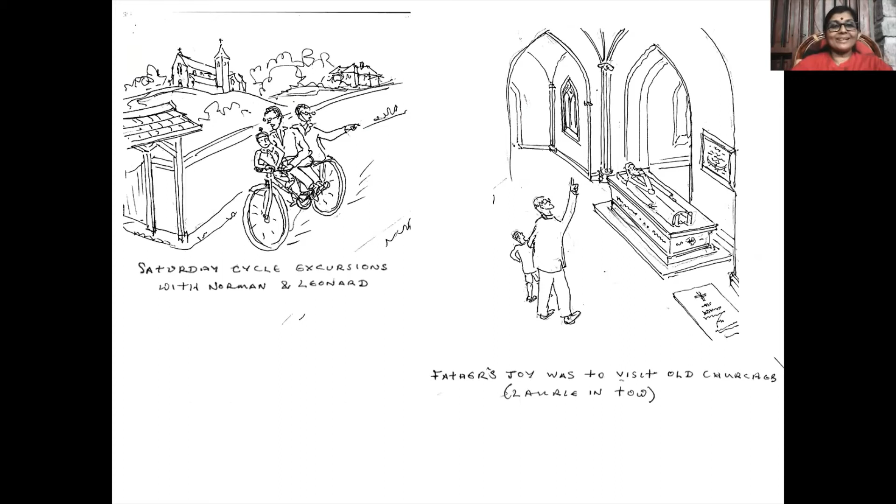But he was always interested in architecture, as you can see from some of these sketches, which are his own. There were Saturday excursions where during weekends he and his brothers used to travel by bicycle around the countryside, look at buildings, and he particularly used to happily share with us how happy his father was taking him around buildings and pointing out architectural features and telling him about the history. So all these influences were already there much earlier, before he joined his architecture course.

And remember me saying about the World War, right? So at that time we had to take the break. But he became a paramedic with a Friends Ambulance Unit, and he had to go to China and Burma.

And while there, he worked very much among the rural poor, to the extent that there was an interesting incident when he met Mahatma Gandhi on the way back from China. In those days, you had to wait for a few weeks at least to get a connecting ship to England. So while he was there in Bombay,

a Britisher, a fellow Britisher, took him to see Mahatma Gandhi, saying, 'You must meet this man.' And while he was there, what happened was Gandhiji happened to notice footwear, which was handmade by himself. Gandhiji noticed it as soon as he saw it, and he asked to see it. And everybody was horrified except Laurie Baker, because he didn't know the cultural connotations of what he did, and

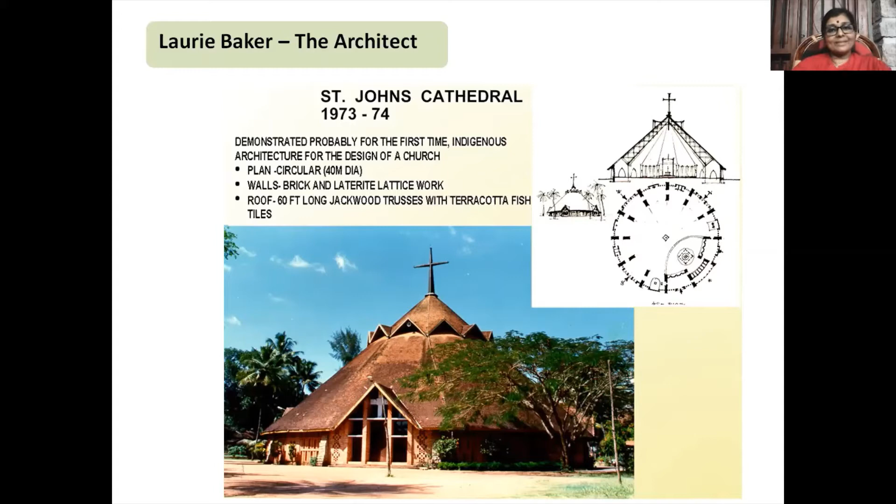One building I'm just mentioning here about Laurie Baker the architect is St. John's Cathedral, which was built in 1973. This building actually won a medal from the Pope for indigenous Christian architecture. But it's also a testament of the times that this building was razed to the ground, and another building similar to this, but with none of the ethos of this building, was erected in its stead. You can look it up, it's St. John's Cathedral in Kerala.

His terrain-friendly design, these are sketches of buildings in the Himalayas, and he had sketches also of how you must approach it, in his booklets, very small booklets which he always wrote and sketched by hand. Now we know what happens when we interfere with the terrain, but in those days he recognized it too. If you think about it, a lot of the things he said then are happening now, the climate change, how we should treat the earth gently, and especially the responsibilities of an architect in doing all this. He spoke about all of these things.

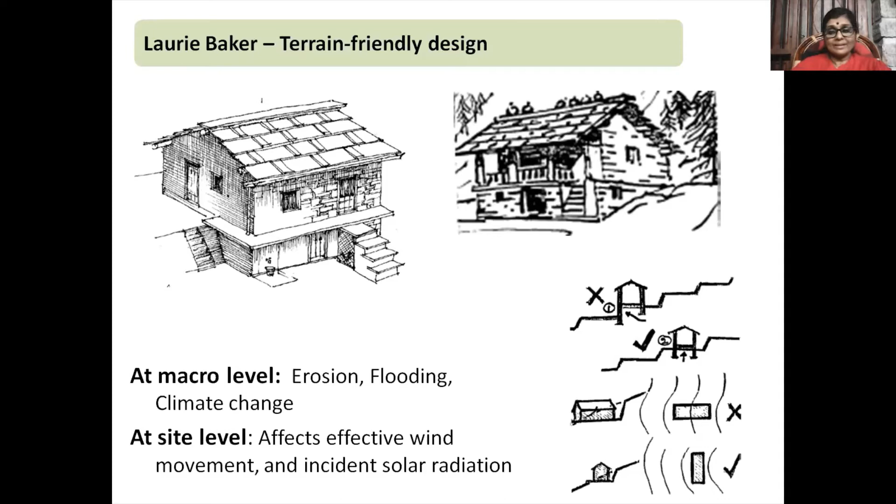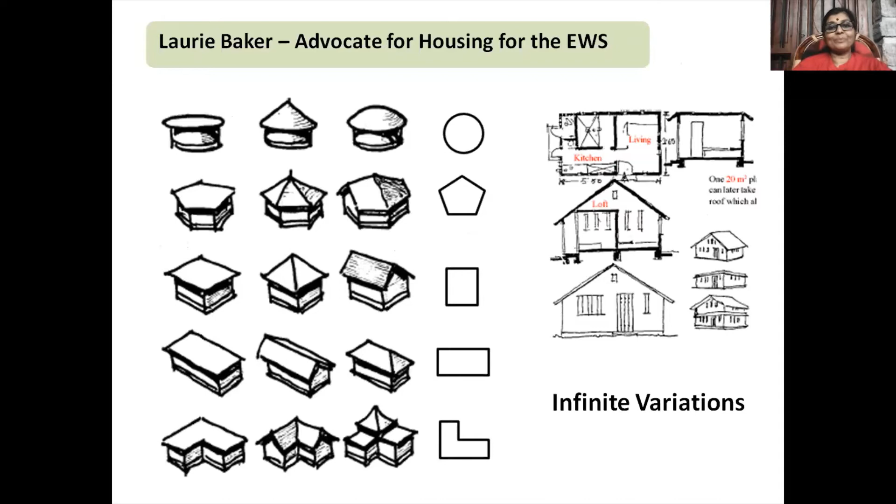He was an advocate for housing for the poor. I'll just skim through these slides very quickly. It was all his sketches saying that we must do these things, like incremental housing, how we could start with a core house and then build up from there. And he sketched infinite variations of the theme of how it all should be different, and not just box-like houses where you put people into.

Can you imagine an architect actually, this is his working out, can you imagine an architect working out the number of bricks in a 20-meter squared house? Because that is the amount of interest he had.

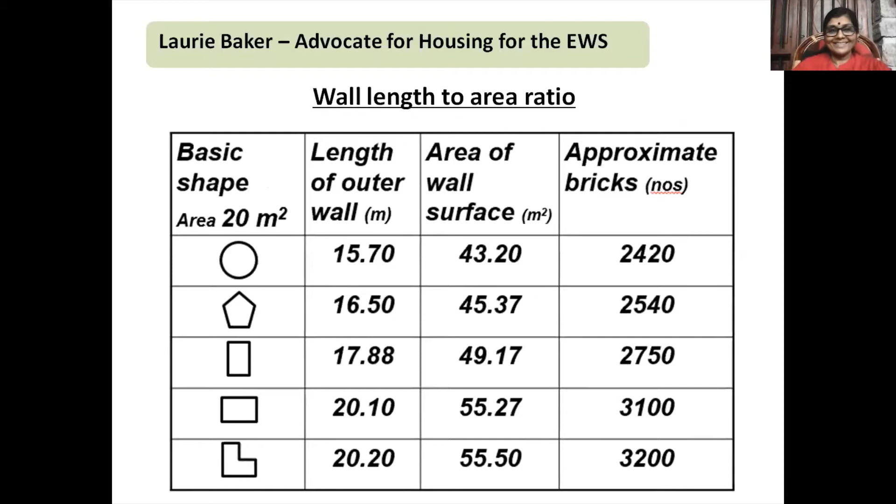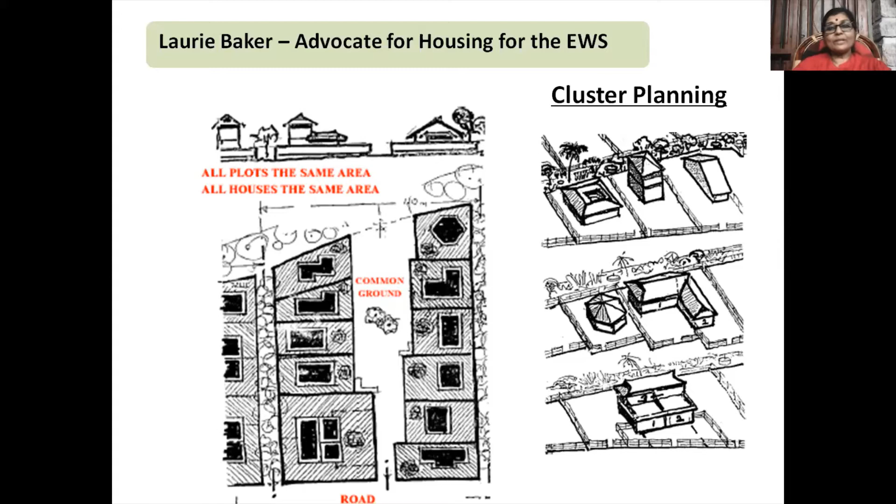And he spoke of cluster planning. You will notice that the common theme when he advocated housing for the economically weaker section was that it does not have to be a type design. You have to have that very personal, very site-specific touch when you design for them. And again, you can see the number of combinations he had. He very simply explained a lot of things through his sketches when he was not actually speaking to people about it.

Moving forward, I've been speaking of COSTFORD, I've mentioned LBC also. COSTFORD, the full form is Centre of Science and Technology for Rural Development. It's a non-profit making organization, established for 35 years now, and Laurie Baker was one of the leaders. We spread throughout Kerala, and occasionally we do work outside also. The reason I mentioned COSTFORD, as I said earlier, is because most of us came to work in COSTFORD because of Laurie Baker's presence there.

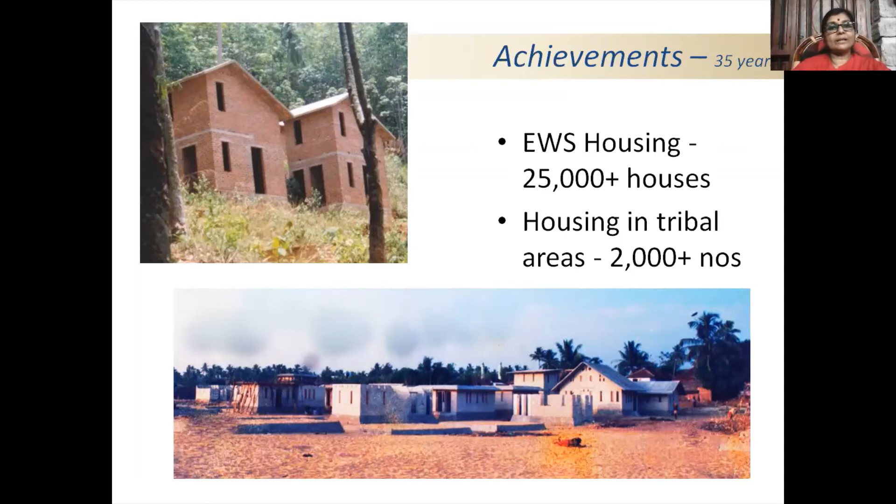Just going quickly through some of the works that are done, in case you thought that COSTFORD, through Laurie Baker's approach, built only houses for the poor. His approach was that whatever you do, it has to be site-specific, climate-friendly, cost-effective. So if you have to build a swimming pool, you build a swimming pool, but make it cost-effective.

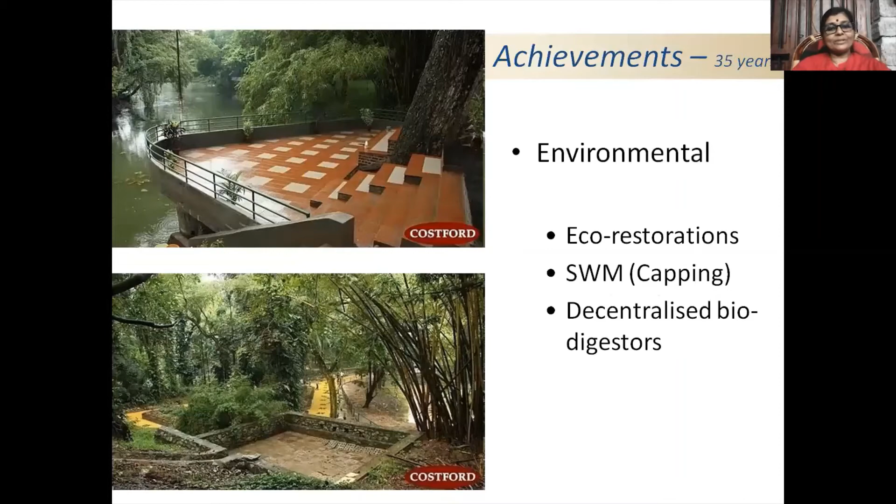These are some projects that COSTFORD has undertaken. Laurie Baker Centre was inaugurated in 2009, two years after Laurie Baker passed away. Now, the reason for this new organization, which is a sister organization to COSTFORD, was we felt after Laurie Baker's passing that there was a need to spread the ideas that he had. It was not just that Laurie Baker was associated with brick and ideas, but there were so many ideas, as you must have noticed now, behind his work. So this had to be told, and there had to be networking between like-minded organizations.

With Mummy's blessing, she was a founding chairperson. Laurie Baker Centre for Habitat Studies was started, and it continues now with these activities. Let me mention the present Laurie Baker Centre campus was designed by Laurie Baker. It was the last project in which he was fully involved from the design stage to the construction stage.

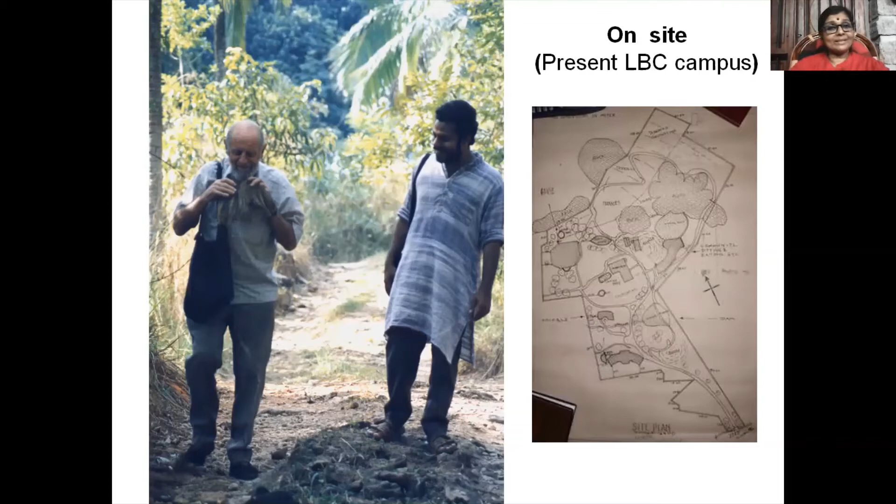Here in this photograph, while he's coming for a site visit to the current LBC campus, he just picked up some coconut husk from the ground, and he's pretending that he has a longer beard than he actually has. As I said, his sense of humor was something that permeated his life and also his architecture, if you think of it. I'll just be showing very quickly some photos of the LBC campus, the buildings within the campus.

LBC campus, excuse me.

These were experiments in Bamboo-crete. This is a water harvesting tank with a lookout point on top. This building to the right is a recent addition, and you will notice that many buildings have started in LBC,

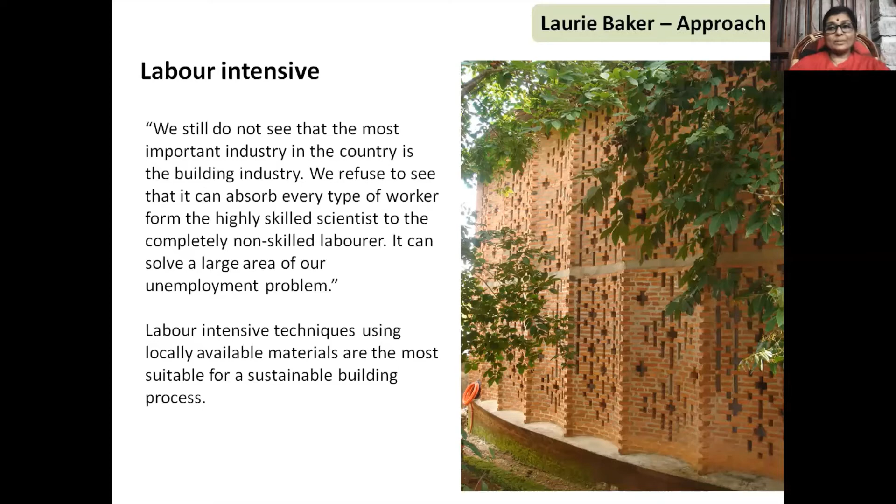He spoke of honest architecture, and said the use of materials, where you can see materials as materials. He said once you start thinking and using materials in that manner, it's not only the building that you're affecting, but it integrates - I'll quote him - integrates in its design all of the needed surrounding. And he was always an advocate of his buildings blending with the surroundings. And he spoke up for labor-intensive techniques, because he said the construction industry can absorb every type of worker. So the lesson we learned from him was that labor-intensive techniques using local materials are usually the most sustainable way of building. And in the coming presentation with Sarjan, he'll explain more why.

When Mommy decided to write a book on Laurie Baker, because everybody sees the architect side of it, she wanted to tell people about some of the background of Laurie Baker, how Laurie became Laurie Baker. And then she decided to name it 'The Other Side of Laurie Baker.'

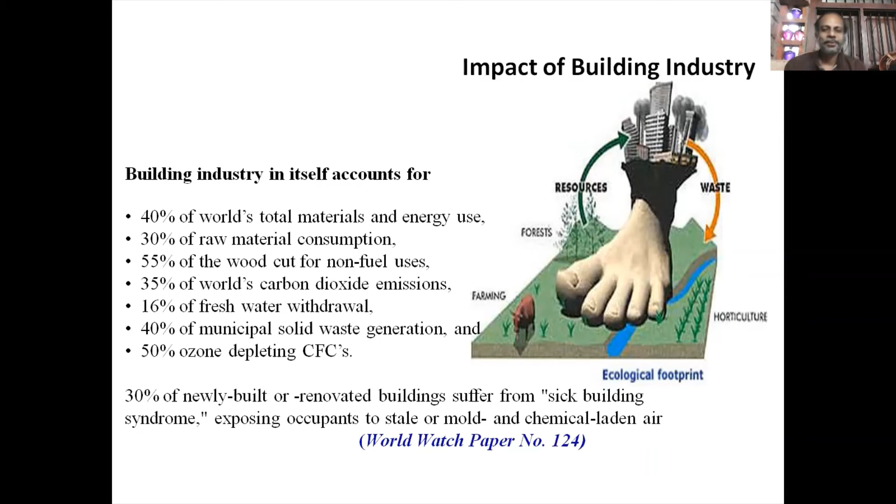The importance of construction with biomass is that when a plant grows, it absorbs carbon dioxide from the atmosphere and stores that carbon in its system, which is called carbon sequestration. That became carbon neutral, a term used in the scientific community. When a tree grows, it absorbs carbon, and when we use that tree as a building material, we are also storing that carbon dioxide in our building. This will reduce the carbon dioxide in the atmosphere.

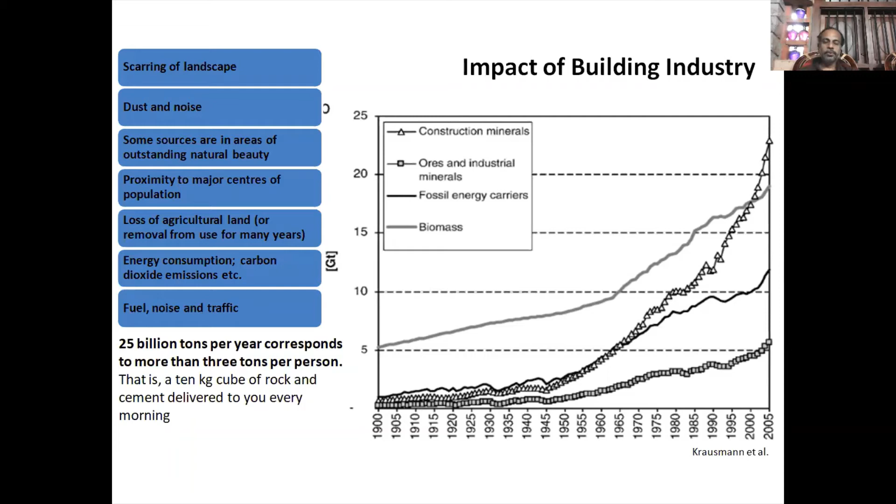Instead, when you produce cement or other materials, 1 ton production of cement will release 0.83 tons of carbon dioxide. This is the comparison between cement or minerals and biomass.

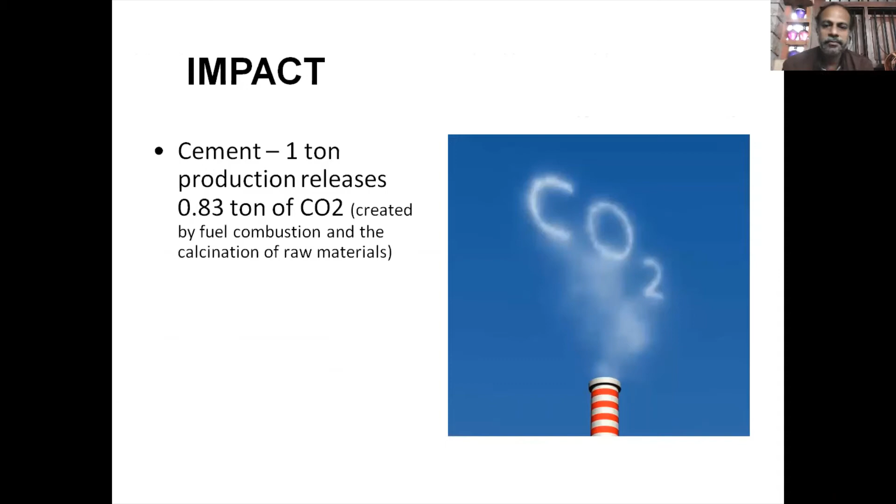See, the process energy requirement of material. You can go through this highlighted one. Cement needs 1 kilogram, and when you produce 1 kilogram of cement, 4.6 megajoules of energy is required. For your information, all of us pay our electricity charges for units. This 3.6 megajoule of energy is 1 unit of energy, and 1 kilogram of cement requires 4.6 megajoules of energy.

See another example. Steel requires 33.3 megajoules. Here you can see this. Glass requires 12.7, and aluminium, 1 kilogram of aluminium requires 170 megajoules of energy.

Most of our new generation buildings use ACP panels, aluminum composite panels, for their outside. Whichever city it may be, Trivandrum or Hyderabad or Bombay or Delhi, all of us are using the same ACP panels for beautification of our buildings. The problem with ACP is that it's a composite material which cannot even be recycled later. The main advantage of aluminium is that it can be recycled, but ACP, because of its composite panel using composite material, recycling is impossible. That is the major setback of using ACP.

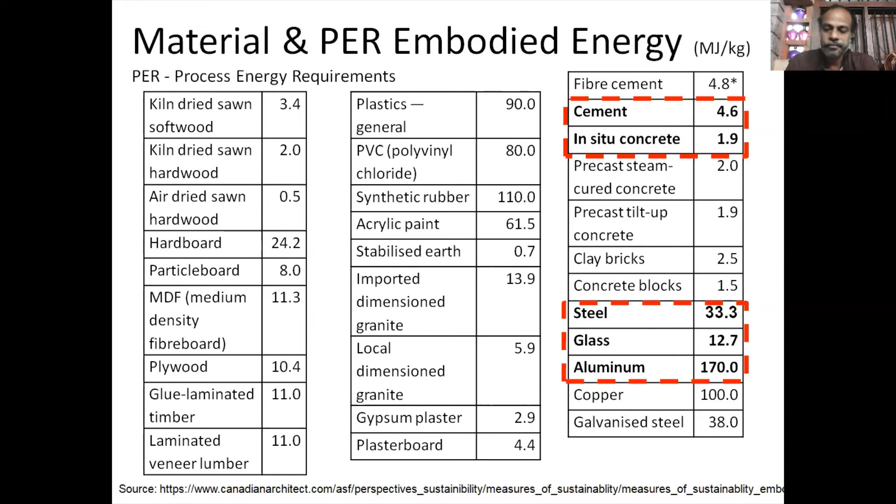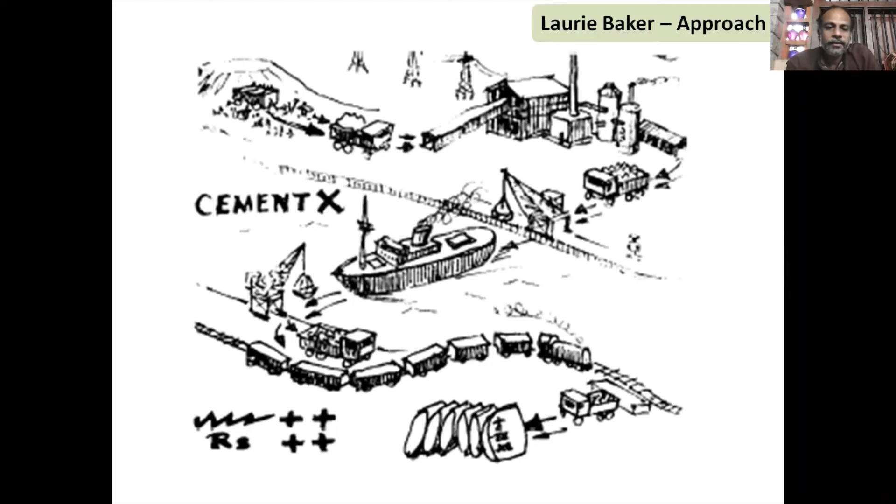But when we compare this with the production of lime, we should also think about who will get the benefit when we purchase one packet of cement. Definitely that will go to a corporate. But when we use lime, you can see - lime is made of seashells, which are a renewable material. From this seashell, it goes to a small kiln.

From there, even local transport is possible. Because when we purchase one packet of lime from here, who will get that benefit? Laurie Baker always thought about these things - this benefit will go to this man and this man and this man, this local economy development.

Laurie Baker was called poor people's architect. People think it's because Laurie Baker made houses for poor people - that's why he was called poor people's architect. But actually, whenever Laurie Baker did something, he would ask himself, while doing this project, who will get the benefit? If the benefit would go to a poor family or a poor community, he would definitely do it. Otherwise, he would think twice before doing that project or whatever action he wanted to take.

That's one of the reasons he always wanted to propagate the use of lime instead of cement, because it consumes less energy, causes less pollution, and also that benefit will go to the rural poor of the society.

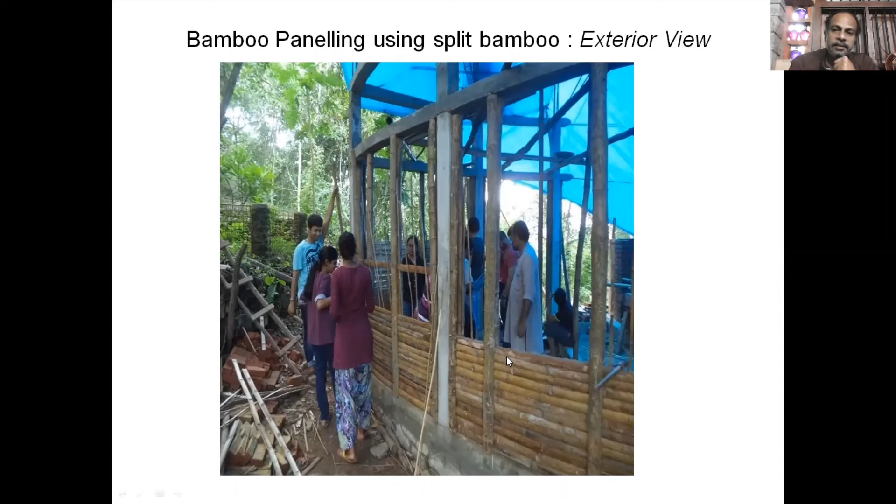This type of bamboo paneling is outside, and inside it is wattle and daub. You can see the bamboo weaved as a wattle here, and inside that bamboo panel we place this wattle and put daub.

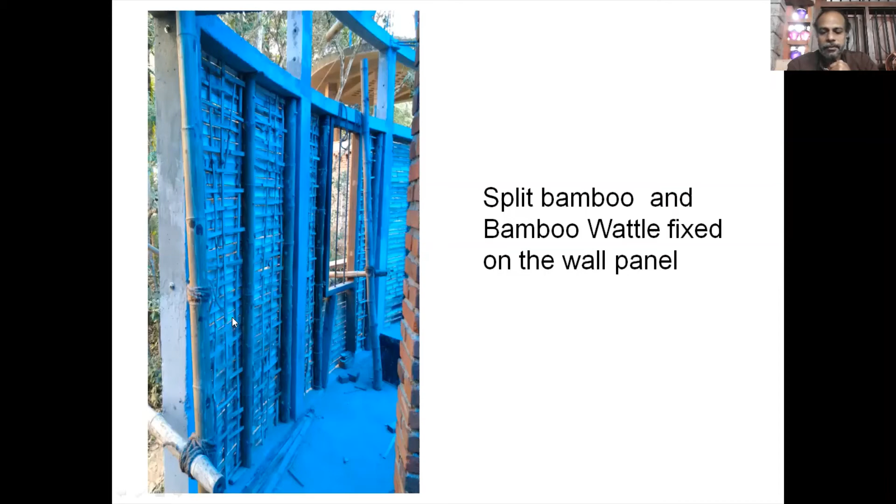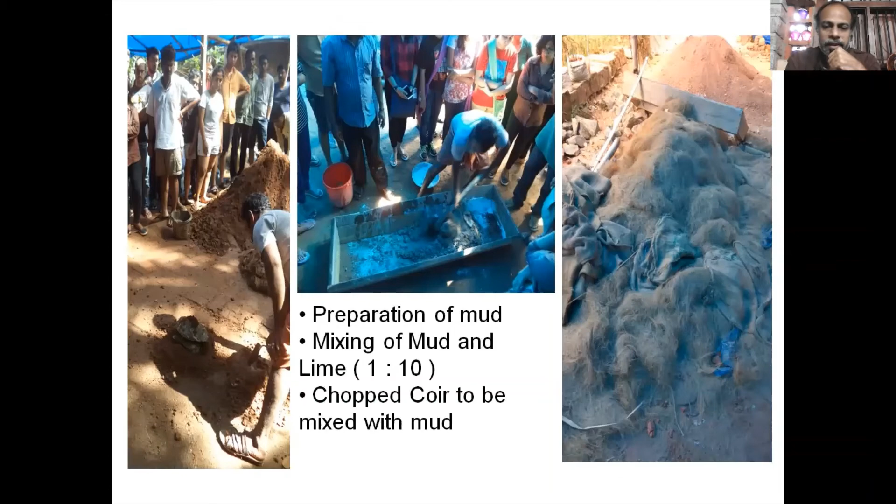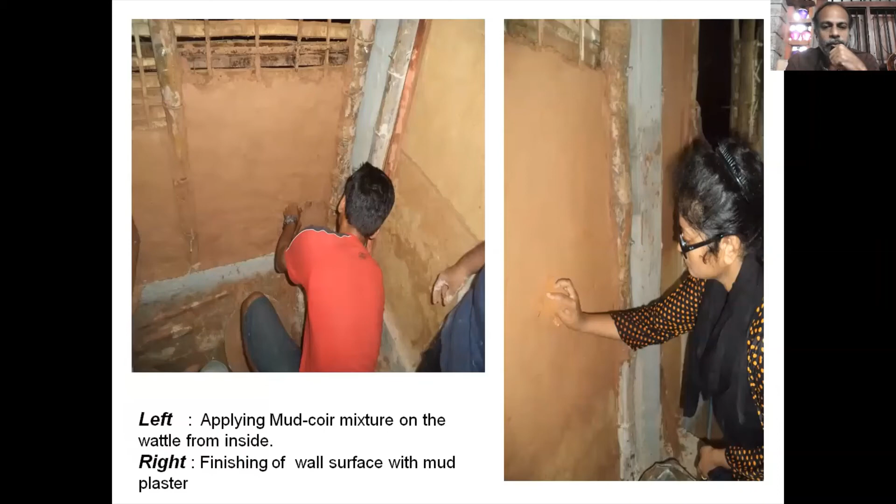This daub is prepared with 50% coconut husk and 50% mud, with lime in a 1:10 ratio, and chopped coir - that is coconut fiber we are using. We mix it thoroughly, mix it 3 days before, and mix it again when we start using it. Then we just paste it from inside, giving us a mud finish inside and bamboo outside, like this.

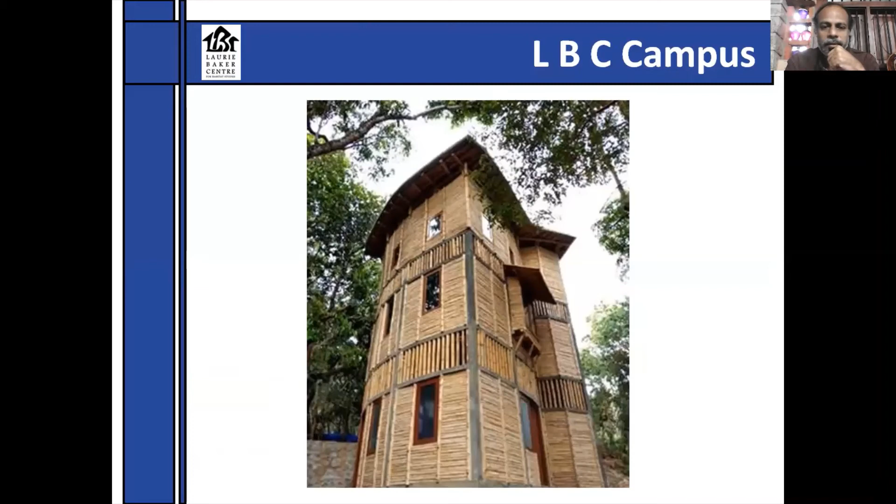When we completed this building, this was the look - a 3-story bamboo paneled building. Here are different views of the building.

This is our house. We tried to incorporate all these things: water sustainability, rainwater recharging, energy sustainability, waste management, and material sustainability. I will mostly speak about material sustainability.

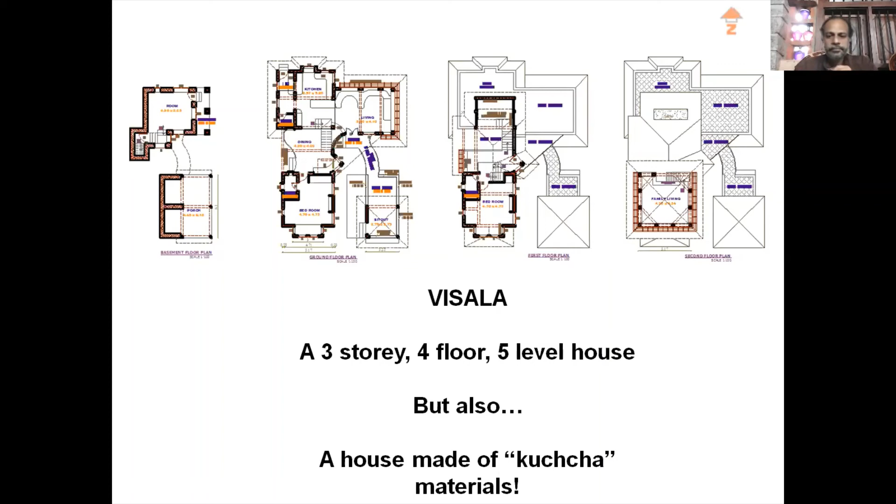And these are the materials used for this construction. Mud has been taken from the site itself, and we did not even transport any mud from outside.

In Kerala we have lots of coconut trees, and most people just sell the coconut tree for making bricks. Coconut was a traditional building material here in Kerala, but now people are not using it.

Bamboo is also used, and some country-built bricks are used too. All our windows are recycled; we used windows from old houses, which you can also see behind in this video. That is actually a 100-year-old window from the old house.

Reused roof tiles are also used, and rat-trap bond double masonry is also used.

You can also go through this IS code for bamboo. You need not simply follow bamboo arbitrarily - bamboo has proper structural stability and a structural certificate from the IS code. The latest IS structural design using bamboo is IS 15912 from 2012, revised in 2016.

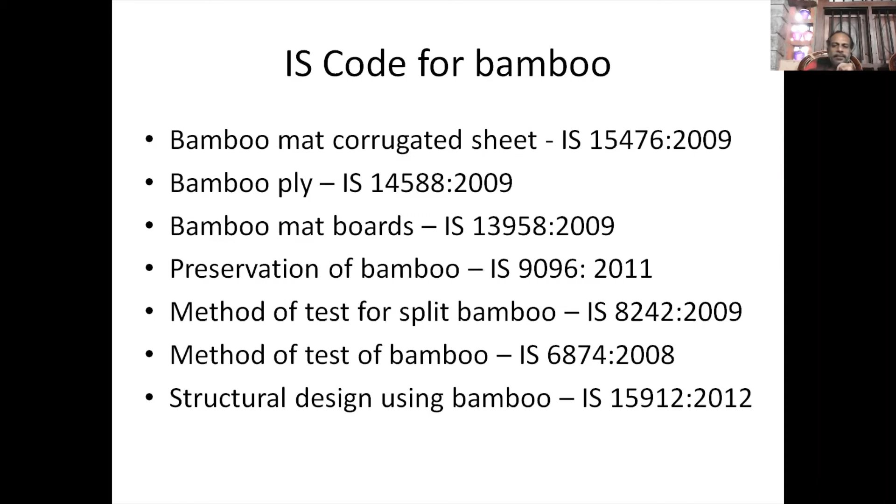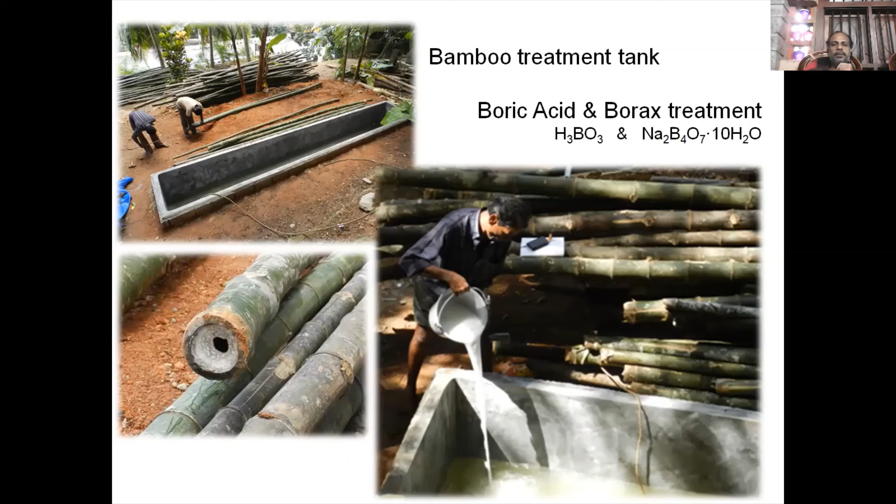For a minimum period - if it is green bamboo, just cut, we have to keep it a minimum of 48 hours. If it is after 2 weeks, then the dipping time will be 3 days, 4 days, 5 days, like that. It will increase the dipping time.

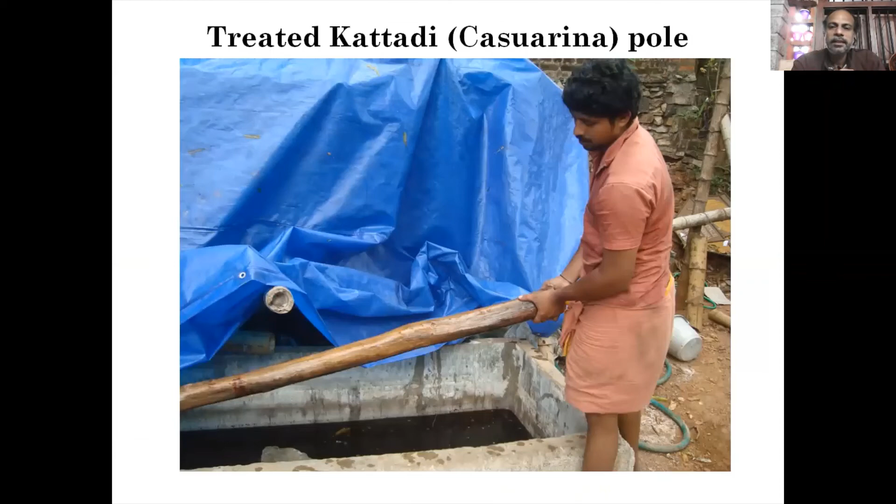We prepare the solution in this tank and dip the bamboo, casuarina, and coconut. All this material we are using gets the 10% solution treatment. Coconut is also smoothened and treated.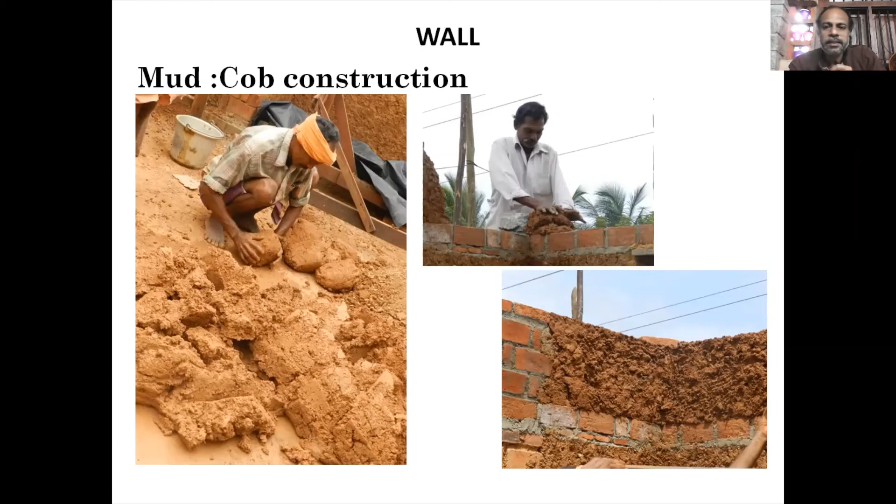During the construction, this is all cob. We make these balls, press it, and make the walls with this cob. During the construction, you can see this.

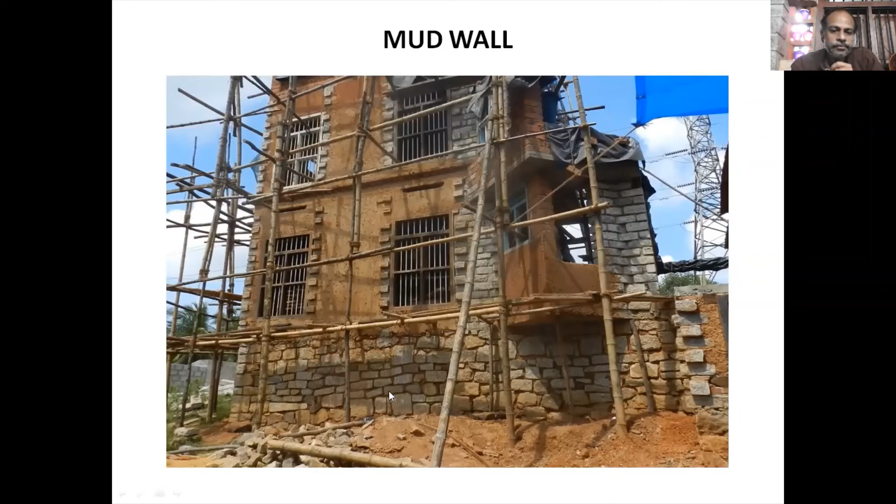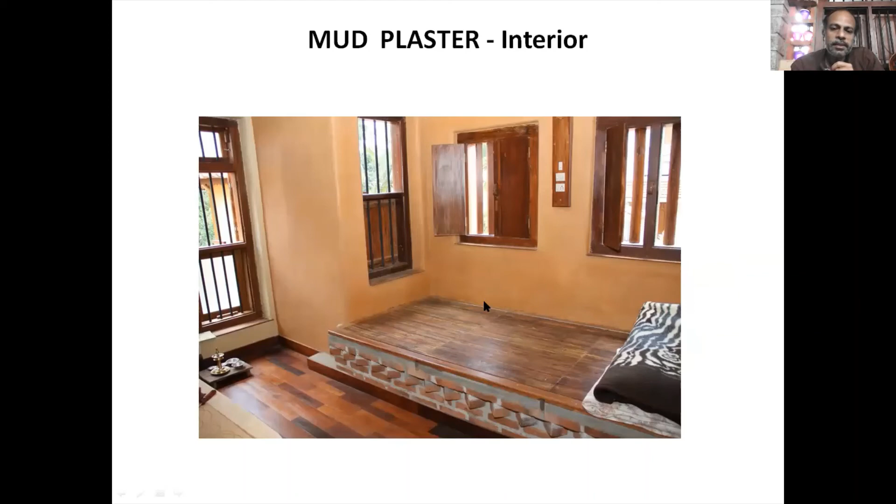The lower portion of this foundation, inside the foundation, is only the water tank - the rainwater harvesting tank. This is mud plaster, and also the entry to this rainwater harvesting tank. We can open this - this is actually a built-in bed, but we can open it and enter into the rainwater harvesting tank.

This is how we made bamboo slabs. You can see the primary bamboo beam here, and the secondary beam here, and this dimension is 1.5 meters or 5 feet. Every 5 feet we have to make a bamboo beam, because the reason was we adopted this bamboo for our use. Actually in Kerala we will not get

bamboo more than about 10% straight bamboo - the other 90% will be bent bamboos only. But when we cut this bamboo up to 1.5 meters, we get somewhat straight bamboo. So every 1.5 meters, we have to make a bamboo beam.

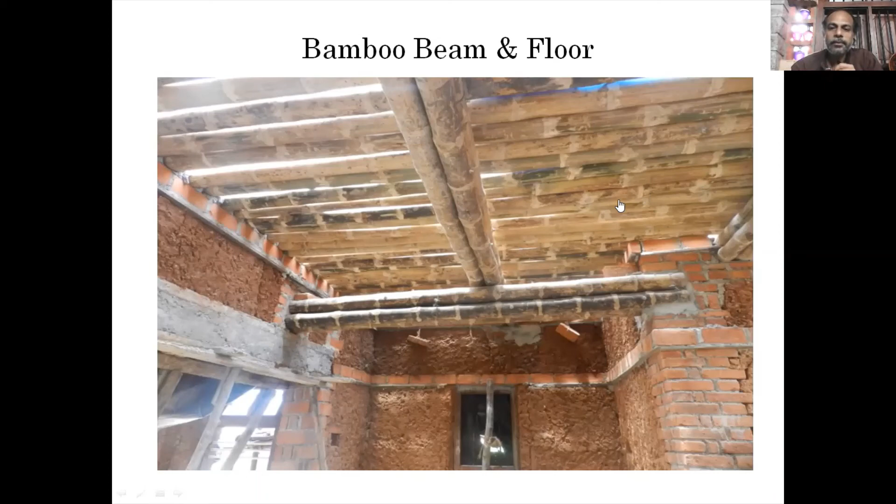On top of this bamboo, we used mud mixed with lime again, completely avoiding cement, placed on top and leveled it - this is the floor. This is the look after completion of the bamboo slab from the bottom. On top of this mud, you can use any type of floor - even terracotta, or even if you want to make a marble floor, you can use that too.

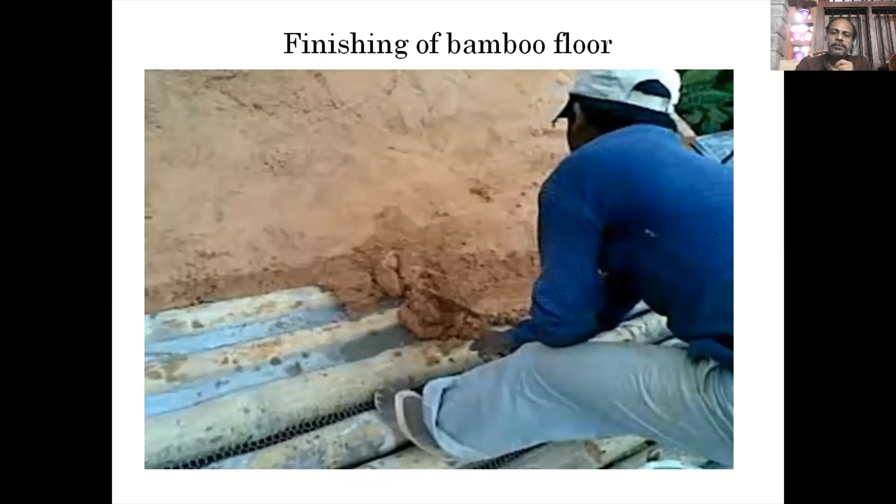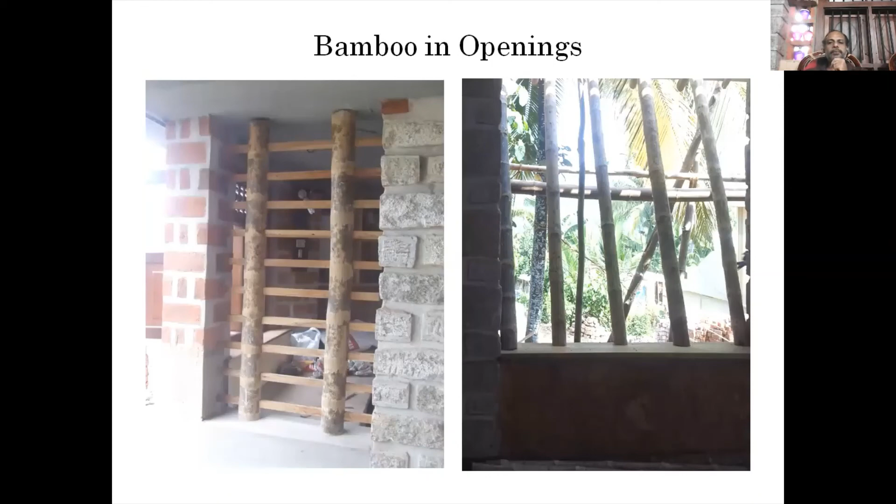Whatever you decided to use for the floor, you can use it. Bamboo openings are also like this. You know, all our Kerala temples have wood, beautiful wood carving. We just replaced that wood with bamboo and did our rooms like this. This is our living room. You can see this bamboo and recycled wood.

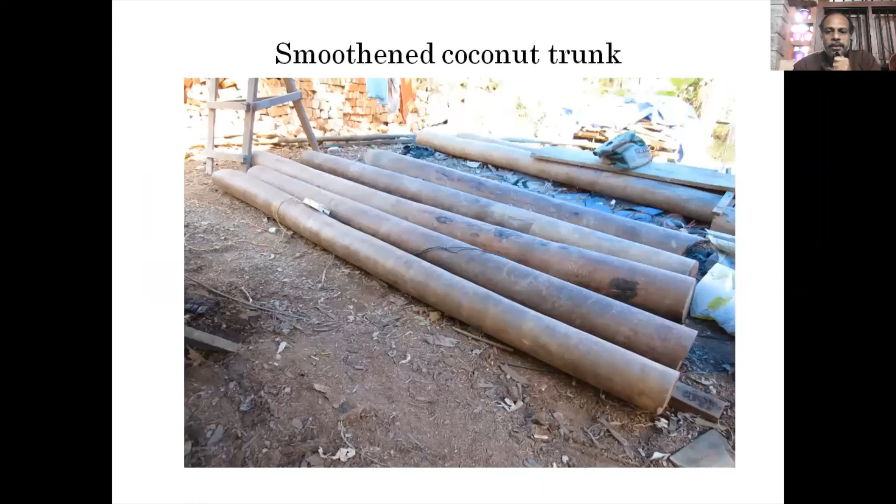Smoothened coconut trunk is also there, and most of our columns are coconut. You can see this, this is our garage. This coconut, and again another coconut column on top. Two floors with a coconut column.

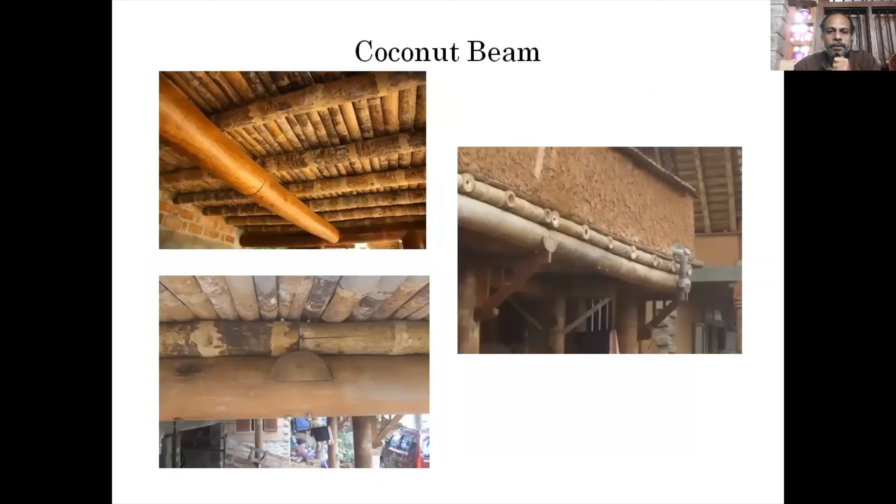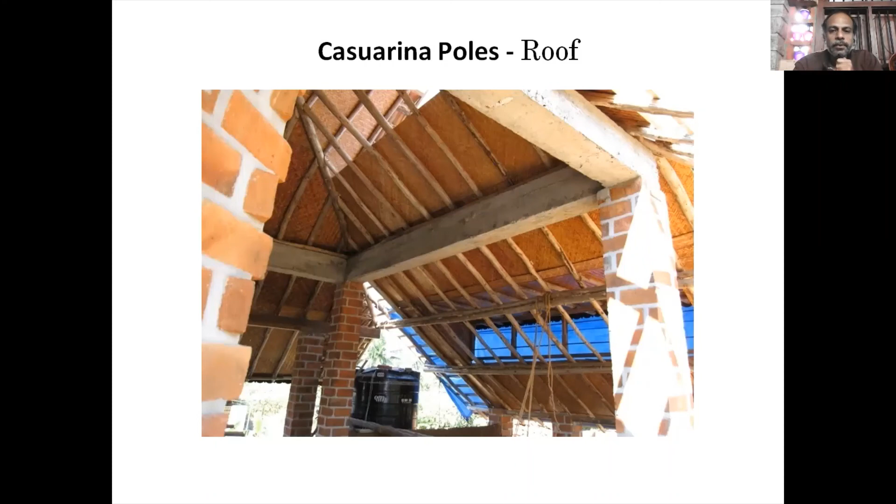Some portion of our garage roof also, we used split bamboo here. Casuarina is the main understructure. That is also a combination of casuarina pole and a ceiling with bamboo ply.

Here you can see this. Just above the casuarina pole, we placed bamboo ply, and all joints of bamboo ply are waterproof, because there are issues - that's why Kerala has sloping roofs with tile roofing. The main issue is leakage. If there is any breakage in the tile, the leak will come inside. We don't want to leak our house, so we decided to put bamboo ply as a ceiling - we preferred that.

Now after 5, 6 years, our Kerala government Bamboo Corporation started producing bamboo roofing sheets also, using the same material but corrugated. They started selling the roofing sheets with bamboo. And here we are actually using double roof protection - one is the tile, and below the tile it is bamboo.

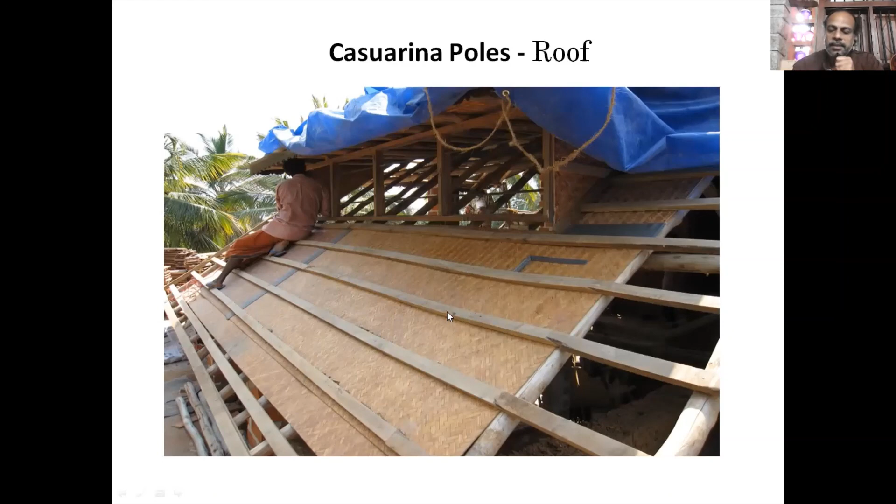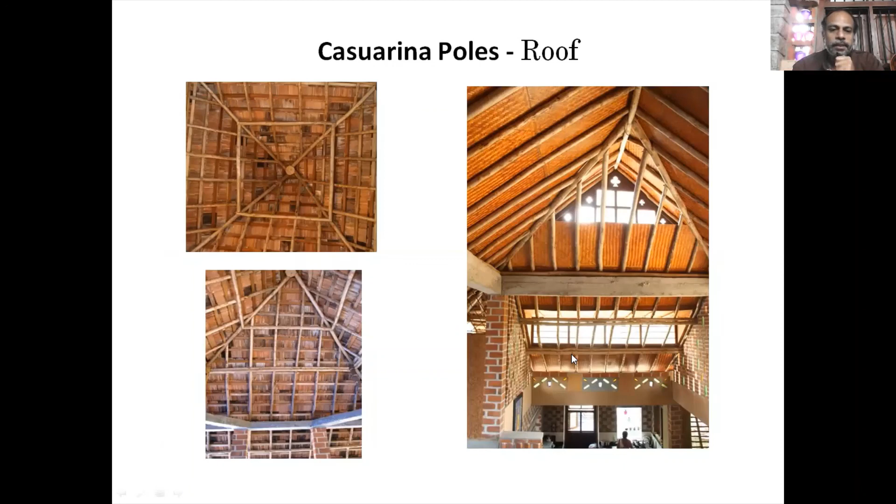All these joints are waterproof, and we put these rafters, and on top of these rafters only we are placing the MP tiles, Mangalore pattern tiles, like this. You can see this one doesn't have a ceiling underneath. This one you can see the ceiling, and these Mangalore tiles, the MP tiles, are also recycled - more than 100 years old.